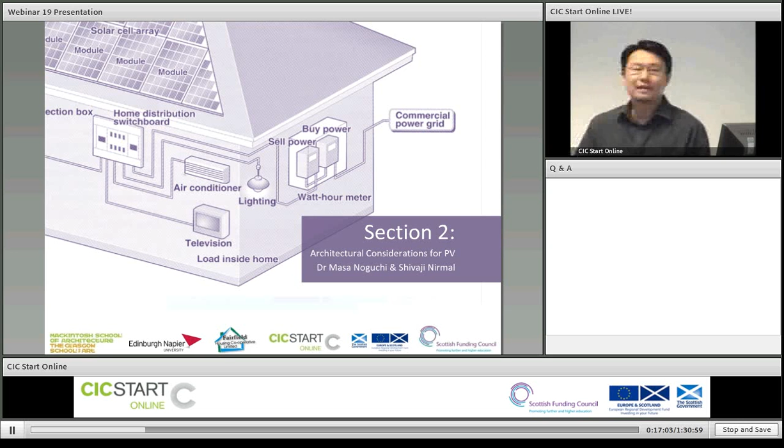Well, thank you very much for the introductions. Anila's presentation obviously gave you some insight and an overall picture of the project itself, I guess. My section is, well, it's not really a rocket science one. It's a kind of soft aspect of architectural considerations for the installation of the PV. These procedures are very often ignored in practice, but in reality, they're extremely important procedures to identify exactly where the PV should be installed.

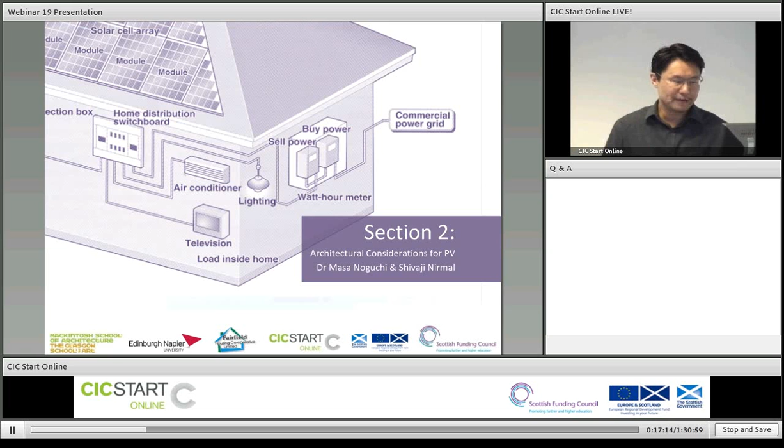Okay, so some shading assessment has been conducted, and I'm going to explain the outcomes at a later stage. Anila already explained the basic characteristics of PV. I'd like to add some before showing the research outcomes. PV itself is an abbreviation of photovoltaic, and PV can be installed in an integrated manner. This could be called BIPV, building integrated photovoltaics. But this project is PV placed on top of the existing properties, so a kind of retrofit. So PV mounted structures.

The commercial level PV is modularized, standardized. The modularity of the units provides lots of benefits, obviously. Modularity of units helps facilitate our choices and the designing and the planning. It also helps reduce the lead time for the installation of the PV. And use of the PV definitely lessens exposure to the fluctuations of energy prices, up and down and getting higher and higher. This tendency will obviously increase over the years to come, unfortunately, but this is a reality.

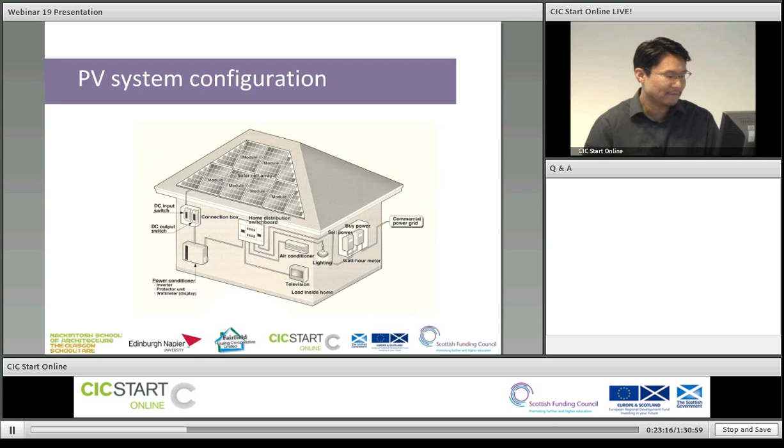In addition to technical features of PV systems, there are a number of kind of soft aspects, architectural considerations that need to be discussed. So this section is more focused on this sphere. Try to understand where the PV system should be located. Location, location, location, obviously. So location factors are very important.

And the variety of PVs available in the market of today. PVs are standardized and modularized nowadays. However, there are many products available, and even PV modules are triangular shapes and rectangular shapes, and opaque, transparent, translucent. Translucent PV is quite fancy, but obviously, efficiency level is not as high as we expect nowadays. But still, it can be applied in future buildings.

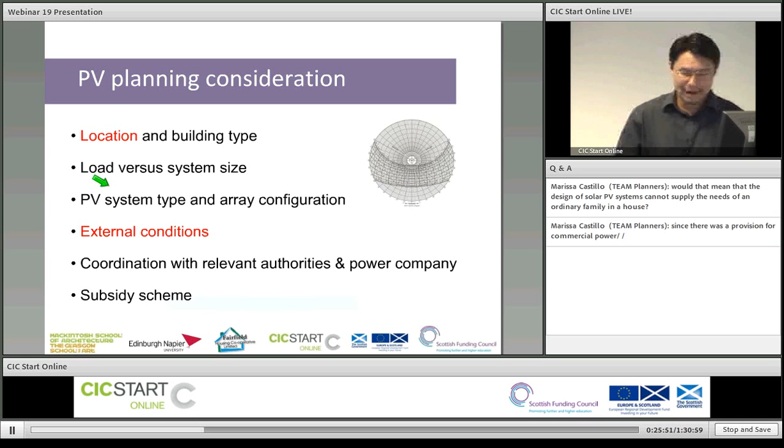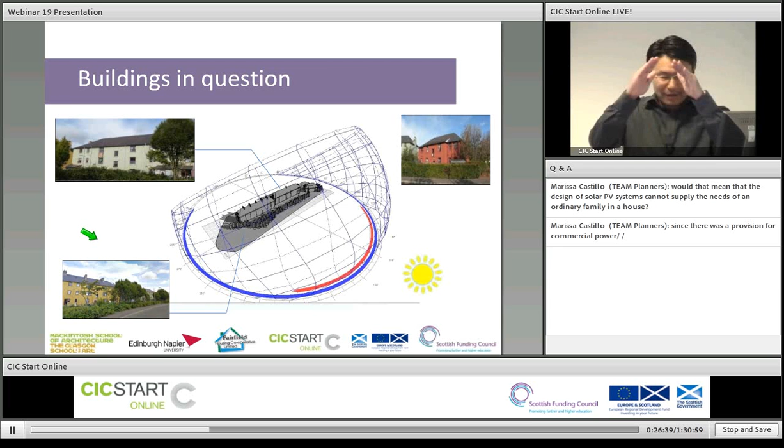And the middle building, this one is a green building. Configuration is very similar to the previous one, and the tilt roof, 45 degrees. The last one is the red building. So as you can see, roof configuration is slightly more complicated than the other two.

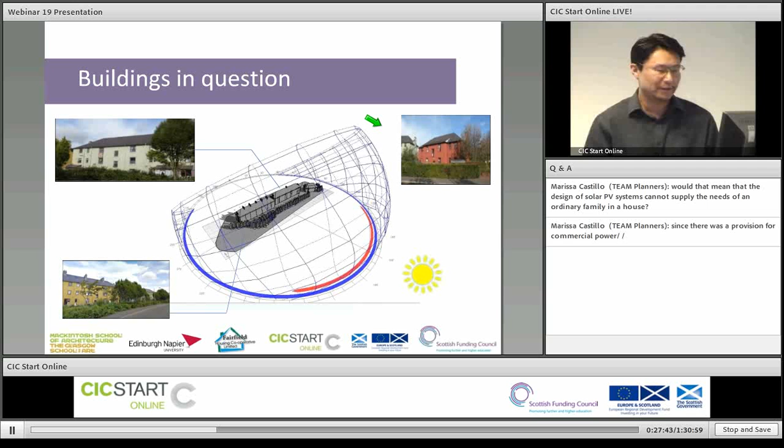So shading assessment has been conducted with due consideration of sun positions, because the sun positions are changing all the time throughout the year. Summer sun is different from winter sun in terms of qualities and availabilities. Qualities may reflect a level of incoming solar radiation, and availability is the time of exposure, completely different in summer and winter. So in-depth analysis had been carried out.

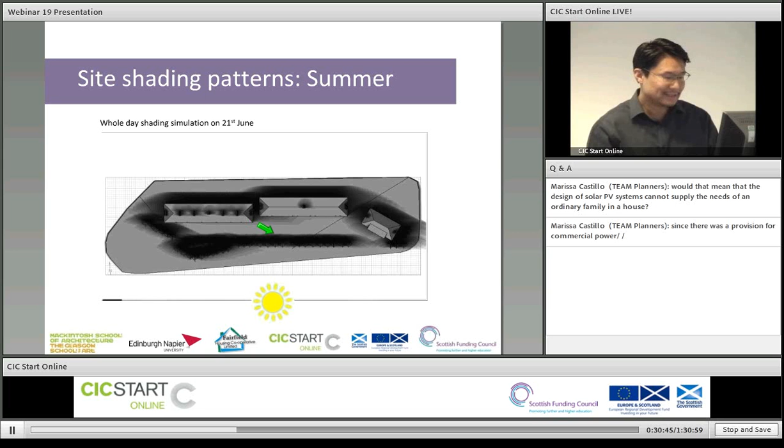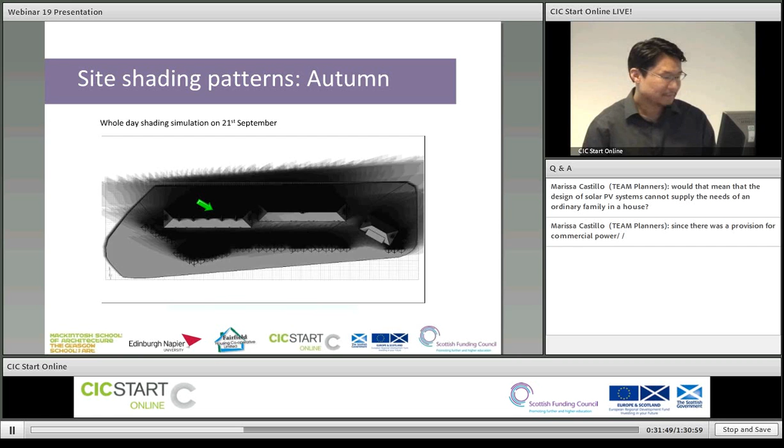The next slide shows winter conditions, which is the 21st of December, winter solstice, in which the sunlight reaches the lowest levels. So the level of solar radiation is relatively low, but quite interestingly, if you take a look at this roof, a south-facing rooftop, there's no trace of shadows, so well lit. That's quite interesting.

So maybe because the availability of sunlight is limited, summer sun and winter sun are different situations. In summer times, the sun comes behind the building, and the winter sun comes from the front. So in this case it's the front. Therefore, the rooftop is well lit, right?

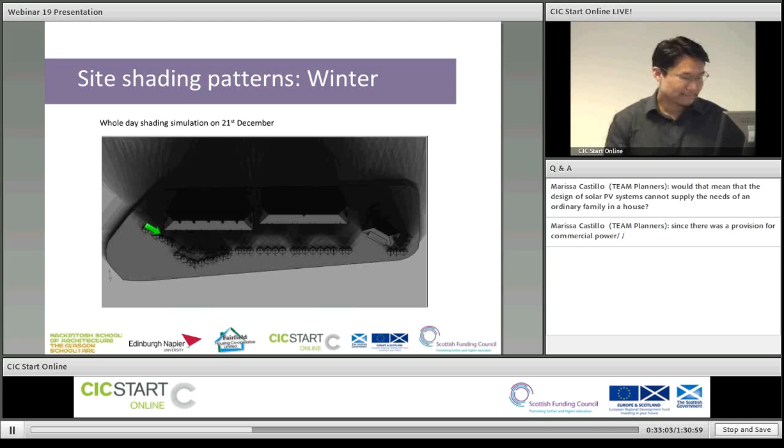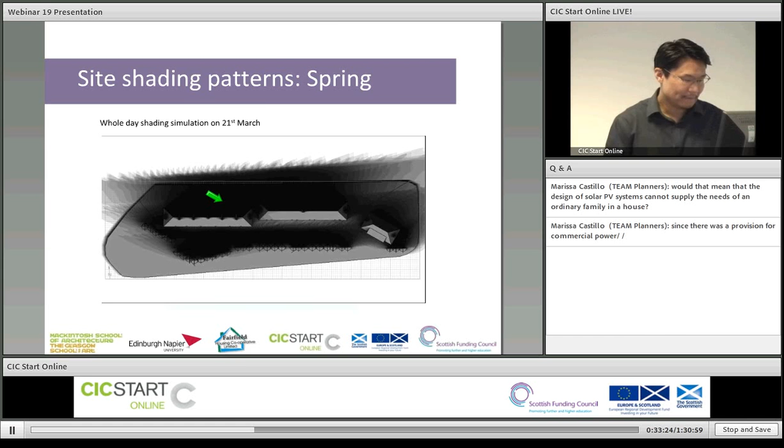And now, spring, 21st March. The spring situation is very similar to what I saw previously in the autumn situation. So take a look, a corner of the rooftop is shaded, right? Because of this particular configuration. So these three buildings were initially investigated. These buildings have their own architectural characteristics that affect the performance of PV.

And as I mentioned previously, the left building is a yellow building, and has many chimneys that cast a shadow. And the middle one, which we call the green building, has one chimney projecting somewhere around there, but most of the south-facing rooftop is quite clean.

And the last one is a red building. The rooftop is clean, and there's no object that casts a shadow. However, the building itself is tilted. Therefore, unfortunately, this helps reduce the solar opportunities by nearly 15%.

So according to the shading analysis results, we concluded that this middle one, the green building, was considered a building which has a huge potential to generate more electricity throughout the year than the others. And therefore, a further in-depth study had to be carried out in order to identify the performance. But before that, we also took a more detailed look at the rooftop.

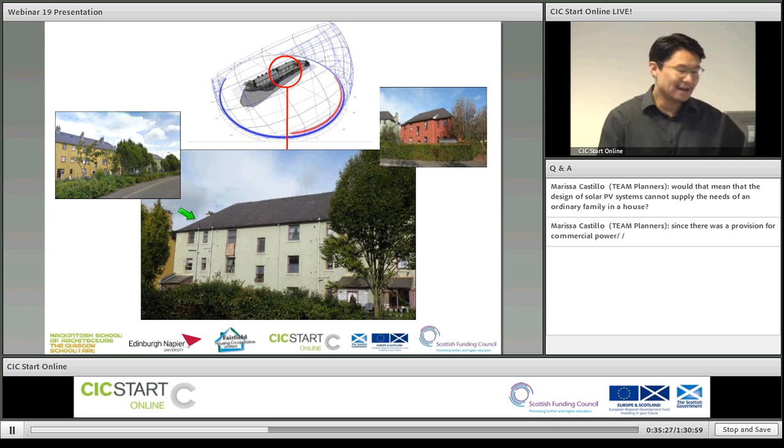I'm going to show a little more. So if you take a look here, there's a little projection. I'm not talking about the chimney. I'm talking now about drainage pipes. Even drainage pipes, south-facing projections, actually generate shadows. Okay? So if the PV is placed around here, these tiny drainage pipes still degrade the PV performance. Therefore, all objects that may harm PV performance must be well investigated.

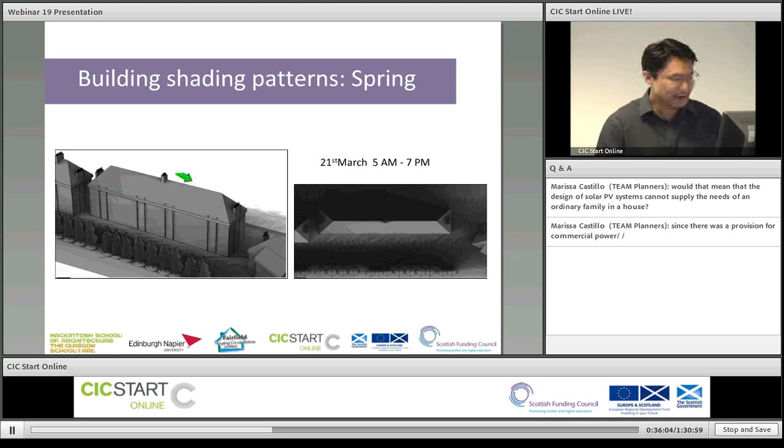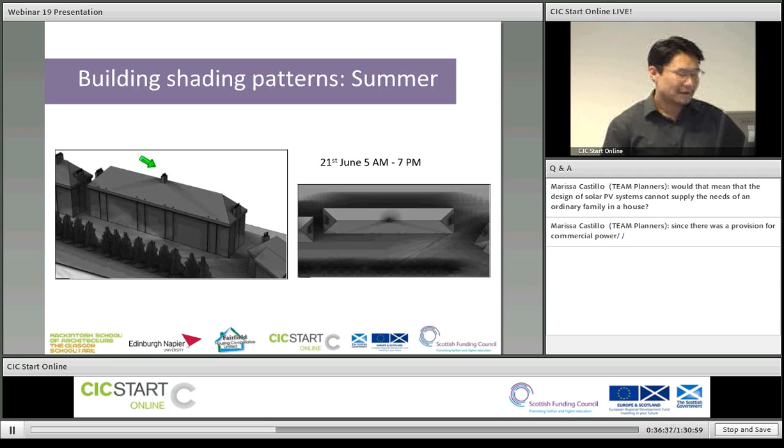So once again, this is the green building, spring situation, summer situation. Surprisingly, this particular chimney actually serves as an element that casts shadow over the south-facing rooftop. The reason behind it is quite simple. It's the summer sun. Sunrise and sunset occur behind the buildings because it's summer, unlike winter. This is quite an interesting result.

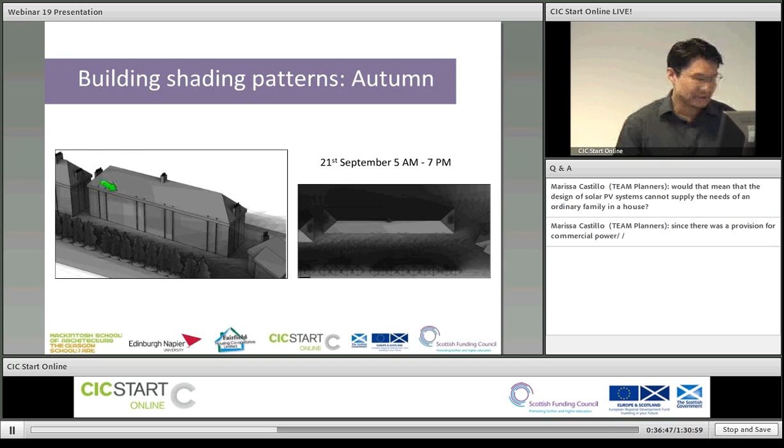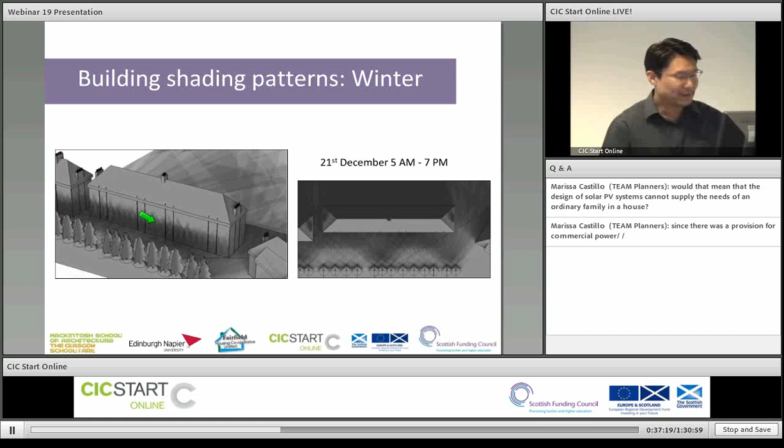Now, furthermore, we also researched the hourly shading profile of this particular roof. We want to know exactly when this left part of the roof starts to be shaded. A 14-hour period of solar exposure starts from 5 o'clock a.m. and finishes by 7 o'clock p.m. 14 hours: 5 to 6, 6 to 7, 7 to 8. And if you take a look at the building closely, in the morning, there are no shadows up until noon.

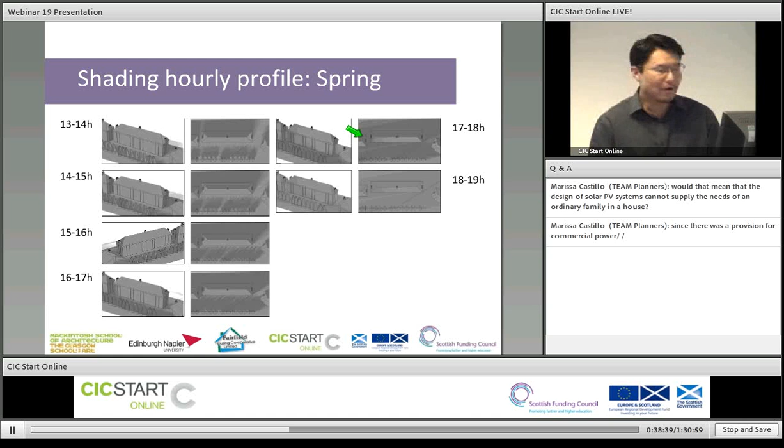So, going to the next slide. Evening is a really similar situation. It's quite clean, no trace of shadows up until right there, around 5 o'clock. So after 5 o'clock, this particular portion of the rooftop will be shaded, affected by the surrounding objects.

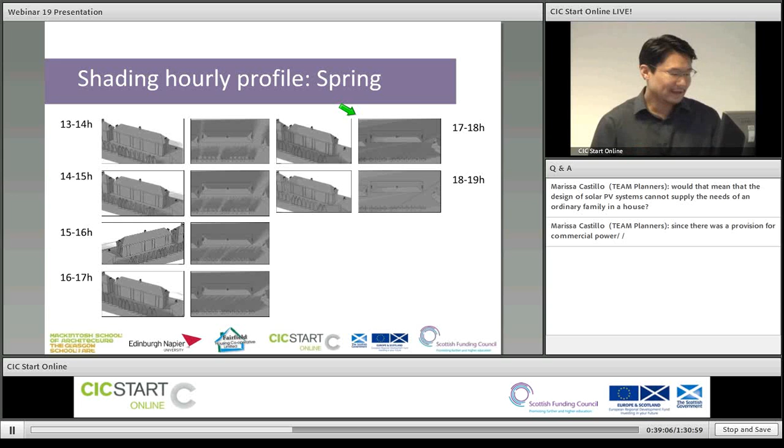So this investigation tells us that this particular rooftop has a huge potential for solar exposure during the daytime, not after 5 o'clock. But it's feasible enough to harvest solar energy during the daytime. And according to the sun shading analysis outcomes, the central part of the rooftop was considered ideal for the placement of the PV.

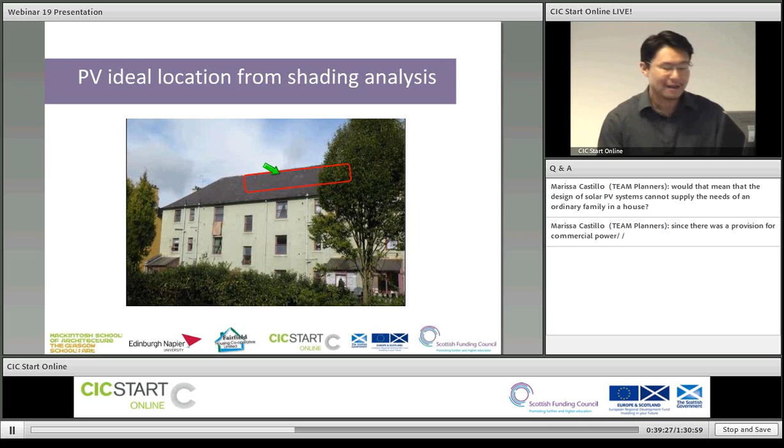The central part was selected not only because of the sun shading profile, but also for more architectural aspects as well. Symmetrical visual balance is also very important to some extent because our PV is very visible. People walking on the street can see it. So architectural integration is another dimension of our discussions, used as an educational tool to influence other people

and neighbors, communities. So this central portion is big enough to accommodate 42 PV panels. 42 panels are estimated to accommodate a 10 kilowatt peak PV system, and the roof area is 70 square meters. Another question arose: how can we place the PV panels, vertically or horizontally? In this case the PV panels are placed horizontally, the traditional way.

The other option is PV panels placed vertically, trying to concentrate on the central part of the roof. However, as we already saw previously, the distance between the chimney and solar panels, and the distance between the drainage parts and solar panels, are critical, because these objects have the potential to cast a shadow.

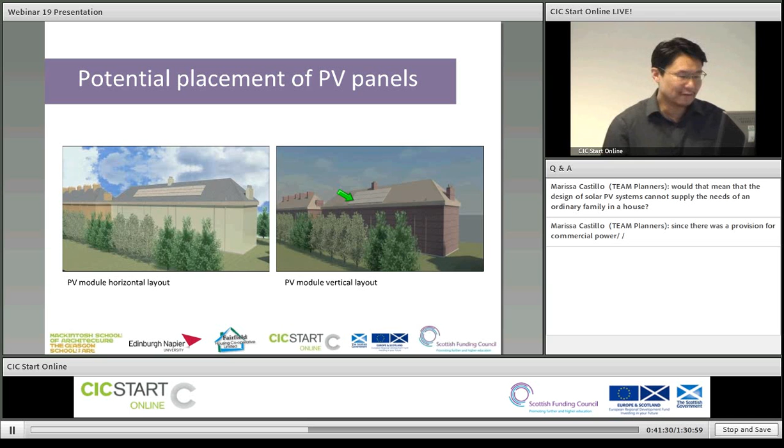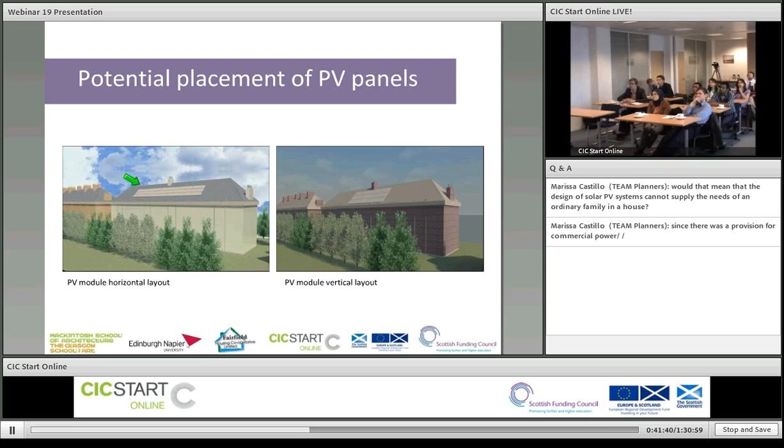According to the investigations, we concluded horizontally extended PV panels should be applied for the purpose of this study. That was our final conclusion. Based on the results of the shading analysis, further technical aspects, performance of the PV and cost effectiveness were investigated by Professor Muneer and the Edinburgh Napier University team. So I'm going to pass on to you for a further report on the more technical aspects of PV implementation.

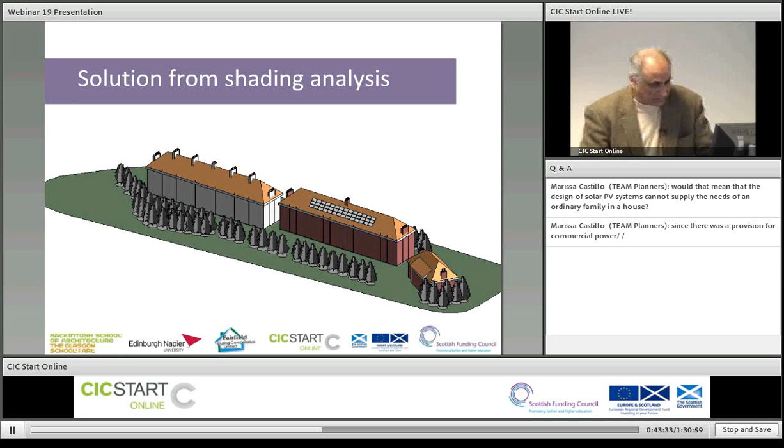They have a 1 million roof program in Japan. They had a 100,000 roof program in Germany, which was extended to a 1 million roof program. They are leading by a big margin. To give you a summary, in Germany they are close to 20 gigawatts of installed PV capacity. In the UK, it's of the order of megawatts at the most.

Then the government, because of its commitment to the carbon reduction program, introduced the feed-in tariff in April 2010. Within 8 months, by about 8 December, they had decided to halve the rate from 43.3 to 21 pence per kilowatt hour. As a result, Fairfield had to dramatically reduce their intentions. They intended to go for 10 kilowatts, the subject of this study. From 10 kilowatts they went down to almost 4 kilowatts. So that is the state of affairs.

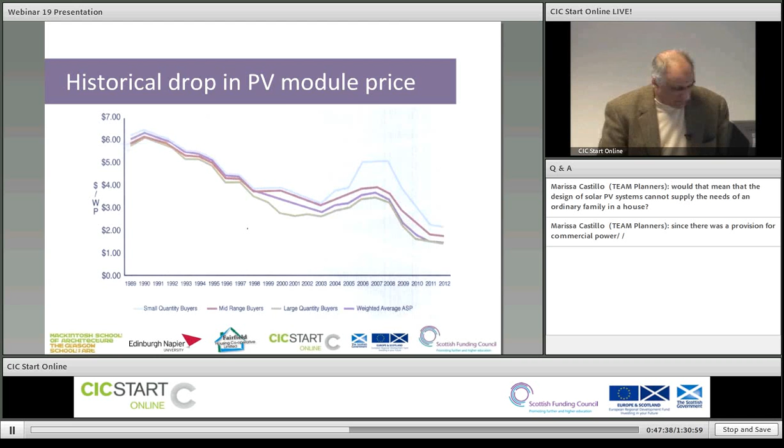Now that's a very serious setback of PV. But the industry is attending to this problem. This problem arises when all the 36 cells are connected in series. So you can imagine if you have a long road, a motorway, let's say, which could be 50 miles long. But if one section of the motorway gets clogged, the entire motorway gets affected. Your journey time will be increased significantly. So the same is with the PV modules. If one cell is shaded, there is a blockage of the flow of energy, and this will affect the entire module.

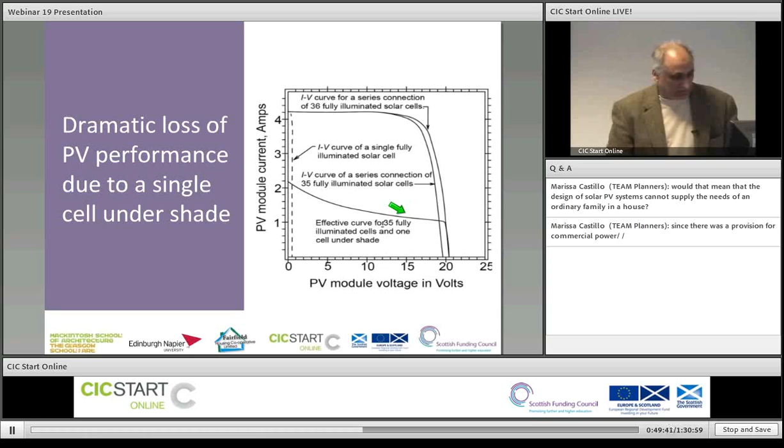So all these studies were taken on board when we designed the facility for Fairfield Housing Cooperative, and as my colleague Masa has shown, the site we had chosen was absolutely brilliant. It was shade free almost throughout the year except low winter sun angles, and it would have delivered, but because of the reduction in feed-in tariff facility, the whole 10 kilowatt facility could not be installed.

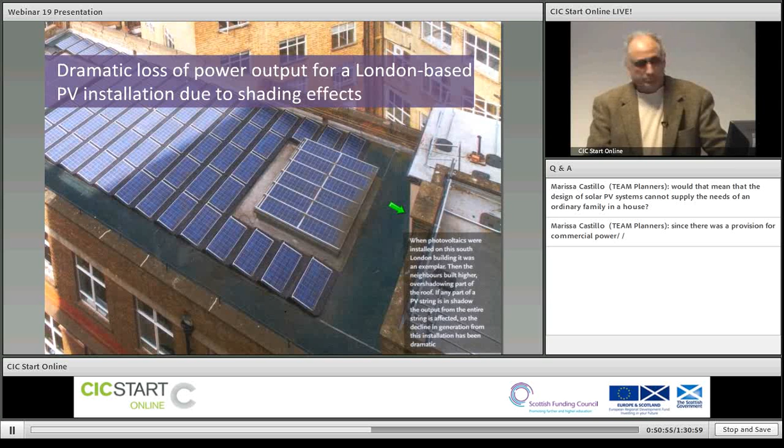Now I'm going to take you through some technical details. How does one attempt to put a design of a PV system in place? As Masa mentioned, the external conditions are very, very important. For the given location, you've got to have data as accurate as possible for the solar irradiation which is available on that site. Usually the meteorological office measures these data, but on a horizontal surface.

And again, they will only measure in most locations the total energy coming from the sun and the sky. So there is a split. How much energy do you get from the sun? How much energy do you get from the sky? The sky energy is known as diffuse irradiation, and the sun's energy is known as beam irradiation. The sum of the two in the scientific community is called global irradiation.

So if you go to the Met Office website, there are something around 70 locations in the UK where they can provide you measured data, hour by hour measured data for global radiation throughout the year. But some locations such as Perth are not in that list of 70 locations. So how do you go about it? Well, you have other sources.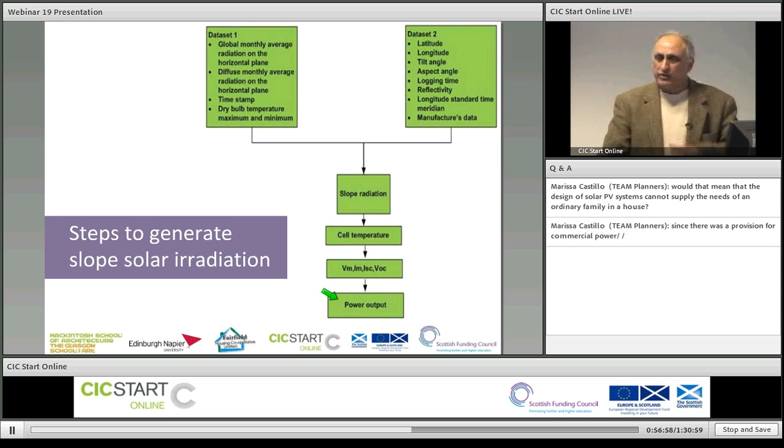So we had chosen for this study a German manufacturer, Schott 240 watt peak modules, but you may find under say summer condition it drops to maybe 200 watt. So you can find this hour by hour for all the months. Okay, so that's the flow diagram. We've gone through that, and here is now the results emerging from the modeling and simulation exercise.

So the spec given to us, the design team, was the Cooperative wanted to go for 10 kilowatt peak. So we were of the opinion to go for 42 Schott panels, each of 240 watt peak power, and those 42 were to be arranged in 3 different strings. The string is a connection of the modules. So if you recall, my colleague has shown you the horizontal layout as being the optimum layout. So we were going to arrange them in 3 strings, each string connected to one inverter.

The more the number of inverters, the better it is, because if one string is under partial shade, the other string will not be affected. If you have one single inverter connected to the entire 42 panels in series, one panel in shade, the entire string would go down in performance. So we were proposing 3 inverters. So this is the monthly output for that design which we are proposing.

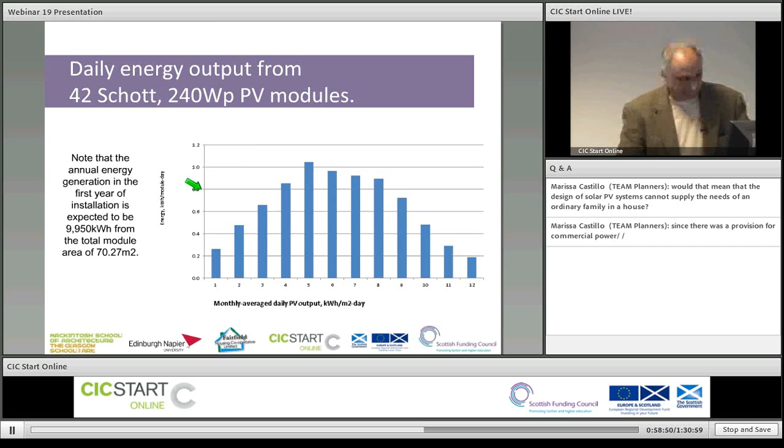Now, one question which was addressed in the report was the environmental impact of the panels. So a number of people at least used to believe that the panels are so energy intensive that in their production, the energy which goes in in the form of embodied energy is never paid back.

I installed a 50 kilowatt facility at Napier University back in April 2005. And for 3 years it was under very detailed scrutiny as part of a PhD program. So we had already found with that facility, which was not on the optimum angle because it was a retrofit application, so it was in a vertical wall. Whereas for Fairfield, the angle was very close to the optimum, which should be 45-degree tilt angle.

The rule of thumb is, if you face your panels in the northern hemisphere towards south, and you have the slope of the panel, or tilt as it is called, at 0.9 times latitude, that will give you the maximum energy output. And this rule has been checked by University of Wisconsin and us at Napier and so many other places, and it is a very valid rule. So it's not just rule of thumb, it is a validated rule of thumb.

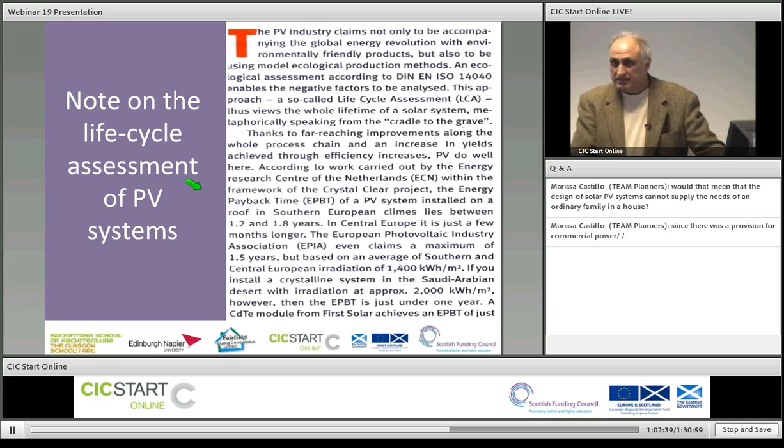So as part of that report, what we have done is we have addressed 3 issues which in my philosophy are very important for any engineering project, not just PV. You have to look at 3 E's. The economy, which is the monetary payback. Because economy can be a misleading figure. Economy doesn't just mean money. Economy could be energy economy, carbon economy, and so many things. So I'll always say in full, economy meaning monetary economics.

That's 1 E. The other E is energy. I just gave you figures for embodied energy and how long it could take to pay back, or how many times over in its lifetime it will pay back. So that's the 2nd E. And the 3rd E is environment. That is the carbon economy. So in this report, we have looked at all the 3 E's.

So we've shown what will be the carbon payback, what would be the monetary payback, and we came up to the figure of 7 years if the panels are kept in pristine conditions, or 10 years if they are left to the vagaries of the sun and rain and hail and so on. Because the dust cover is a realistic thing. It will happen, and there will be degradation of the performance because of dust buildup, bird droppings, and so on and so forth. And this is only obtained by practical experience. You cannot model these things easily.

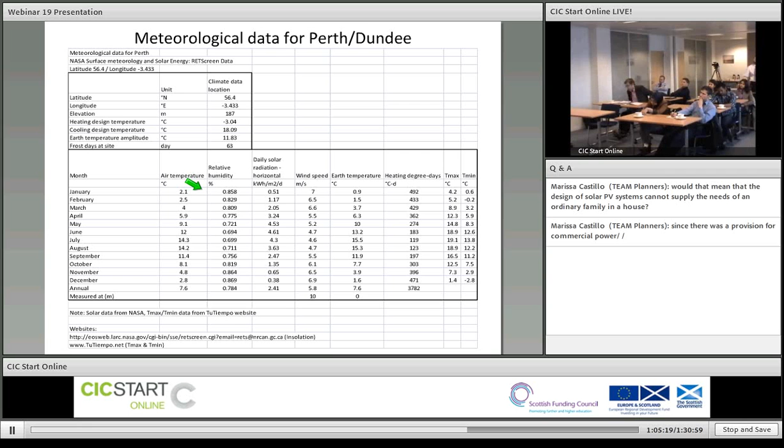Because I have operated a facility of 50 kilowatt at Napier for the past 7 years, I know the degradation will take place. So just to give you a figure, at Napier University, the panels were BP Saturn panels produced in Spain. The quoted figure was 17%, but in reality, they will change month by month, but the variation was between 11 to 14%, the measured efficiency, because that takes into account the dust and dirt buildup, the bird droppings, the inverter losses, the cable losses, and so on and so forth.

So based on that, I would say that the payback for Fairfield would have been 10 years, not 7 years. But still, it would have paid back 2.5 times over in a life of 25 years. So in the report, there is great detail of all these measures, which I'm showing you. One such sample is there. That's the meteorological data obtained from the NASA website. And the RETScreen software, for example, lets you link directly with this database. It will cover the entire globe. So those are interesting figures there.

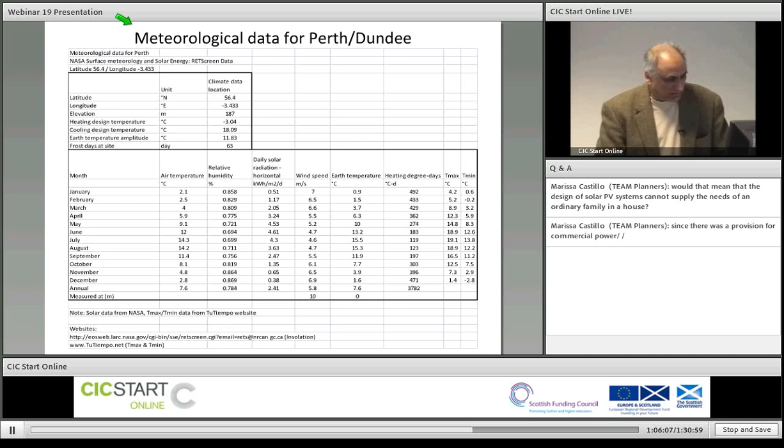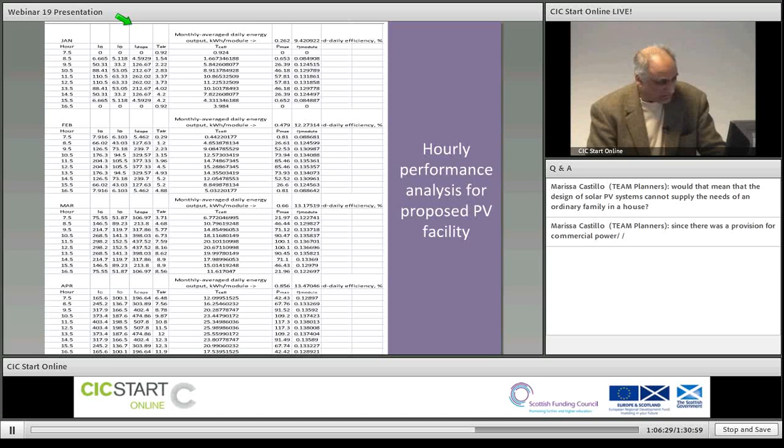We also provide hourly performance of the voltage delivered, the current produced by the modules, the power produced by the inverter, the cell temperature. All those details are part of the modeling output. So this is for the remainder 6. The first slide was the first 6 months, this is the next 6 months.

And this slide is showing you the monetary payback year upon year, and the column shown in red is the 7th year. So if, as I say, you're really going to go on the roof and clean all the modules every day, you will get payback in 7 years. But more realistically, 10 years.

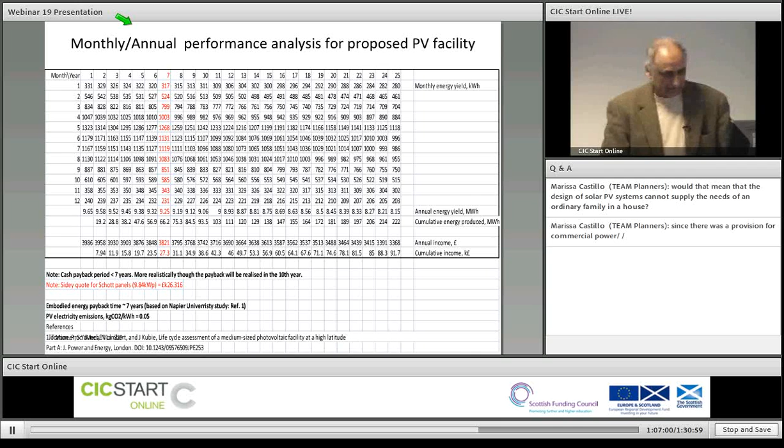They have gone to gigawatt capacities, and in UK, we are in wind. UK is doing quite all right, especially Scotland. Very ambitious plans, and also good action has taken place. But on PV, we are a bit behind. We're dragging.

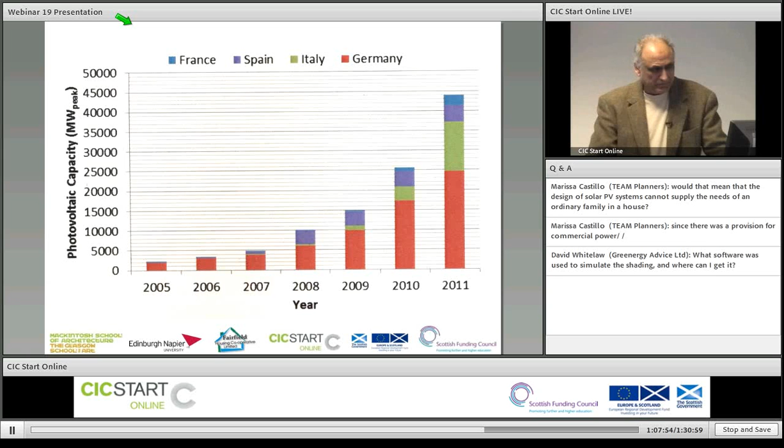So another message: at the end of 2011, Germany had installed 29.3 gigawatt capacity of wind and 25 gigawatt solar power. The Sun and Wind Energy magazine reported that in 2011, on a summer day, the PV electricity in Germany was 31% of the country's intake. 1/3 of the energy was produced by PV on a sunny day. That's a very, very big figure.

Regarding the cost, I've already mentioned the Chinese average crystalline silicon module price fell to $0.96 per watt in January 2012, and a low price of $0.96 per watt was recorded for large orders from German distributors. So these are the latest issues of Renewable Energy World.

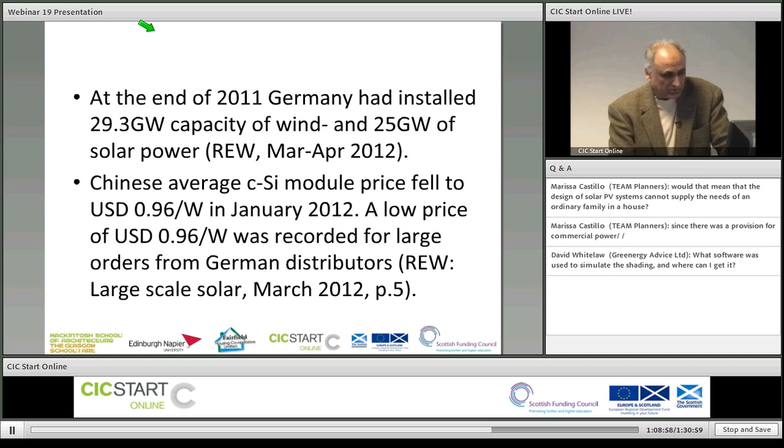Just to give an outlook on what actions are taking place in the industrial sector, here we have a newer kind of technology, heterojunction modules produced by Sanyo, and they will hold the efficiency at higher temperatures as opposed to the classical technology, just crystalline silicon.

The HIT will use a sandwiched design of amorphous silicon and crystalline silicon, and they therefore maintain the efficiency at a higher level even under higher cell temperatures. So all these actions are helping bring the price of the delivered wattage as low as possible.

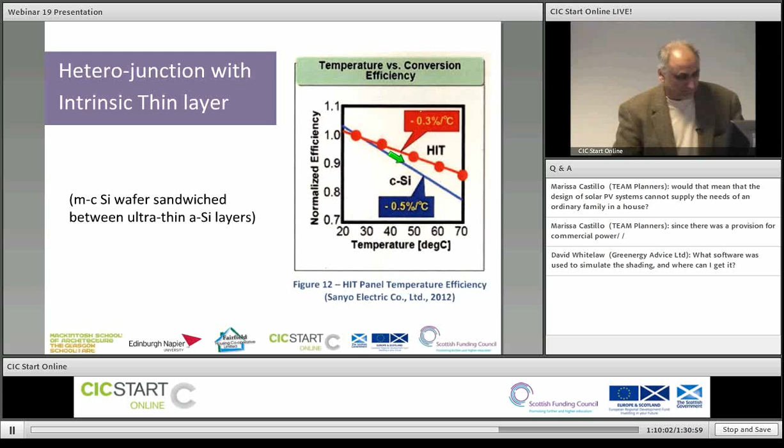So that's the end of my presentation. Thank you very much. And we can now take questions.

Thank you very much, Tariq. Please take a seat over there. Thank you to our speakers, and now we can start with our questions and answers session. We have already a few questions from our online viewers.

So let's see. The first question is from Marissa Castillo of Team Planners. Would it mean that the design of solar PV systems cannot supply the needs of an ordinary family in a house? Who would like to answer that? That was related probably to the start of the presentation. So could you say whether a PV system can supply energy for the needs of one ordinary family?

Well, I think it's always a balance between housing energy needs and the energy supplies. So I'm not really clear about the exact question. However, it depends on the capacity of PV, how big the PV systems that have been chosen are. For example, a conventional house requires 20,000 kilowatt hours of energy.

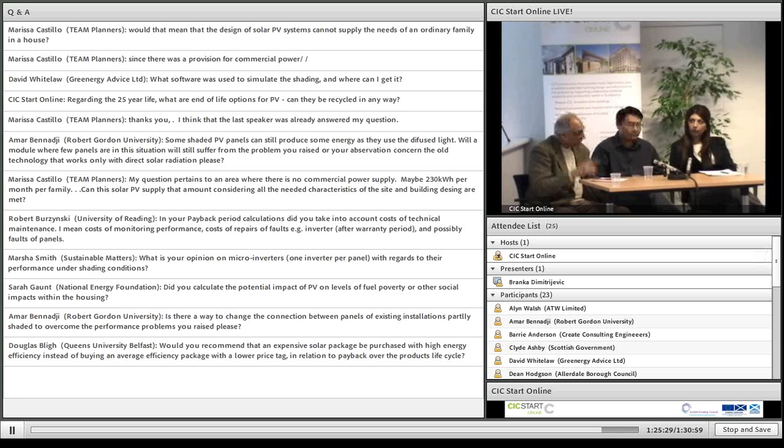The height was taller than the chief executive who was holding that panel. It was in one issue of Sun & Wind Energy. And that company had plans to bring that into market. One inverter per panel. So you have a panel which gives AC output direct, and 1 kilowatt of it under peak conditions. Now that is the way technology is moving.

So if we have that kind of technology, yes, fantastic. However, I think in terms of the price it is obviously more expensive than a lower number of inverters. And shading is one of the key aspects of PV installation. So each panel has their inverter, so it also avoids shading negative effects. But on the other hand, inverters eat to some extent electricity, so efficiency is not as much as centralized inverter systems. But there's always a kind of balance that needs to be taken into account, I guess.

Okay, a question from Sarah Gaunt of National Energy Foundation. Did you calculate the potential impact of photovoltaics on levels of fuel poverty or other social impacts within the housing? Yeah, it's a very, very good question. But our study was focused on the design for the Fairfield housing cooperative. The energy cooperative, as you know, is a very intense topic. The sociologists are very much interested in that. So it's a topic of great debate and discussion, and if I had a grant, I would love to engage myself and my students in that, but that's a different topic altogether. No, we did not go into that area.